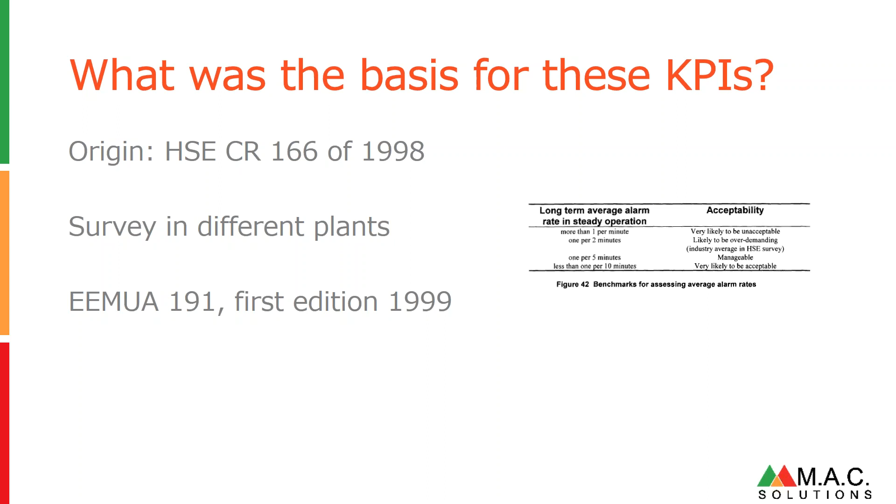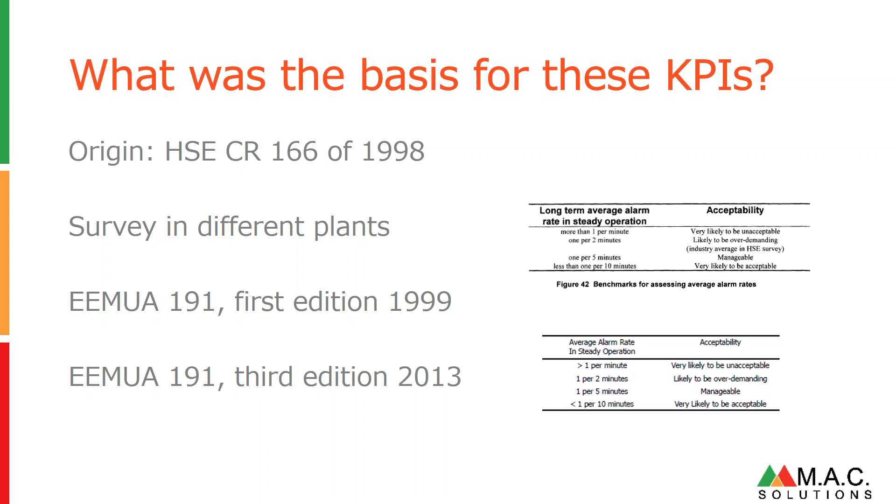So these figures made it to the first edition of the EEMUA 191 publication, which is a guideline on alarm systems, and they have made it until the third edition, which was released in 2013. And there is a table in that edition that says that more than one alarm per minute in steady operation is very likely to be unacceptable. 1 per 2 minutes in steady operation is likely to be over-demanding. 1 alarm per 5 minutes could be manageable, and less than 1 alarm per 10 minutes is very likely to be acceptable. So being part of EEMUA 191, it has also made it to the first edition of the ISA 18.2 standard on alarm systems.

In that first edition, you will find in figure 14 an alarm performance metrics summary, which indicates that the annunciated alarms per day per operating position would be very likely to be acceptable at the rate of 150 alarms per day, and the maximum manageable rate at 300 alarms per day. The annunciated alarms per hour per operating position would be very likely to be acceptable at 6 on average, and maximum manageable at 12 on average. Or, in other words, the annunciated alarms per 10 minutes per operating position would be very likely to be acceptable to be 1, and maximum manageable to be 2. You see there's already a slight difference between the survey performed in the 90s and how it is presented in this table.

Now, when IEC 62682 took the ISA 18.2 standard and they looked at the table, they figured out that the maths were not done properly, because 6 times 24 is 144. So they said in their table the annunciated alarms per day per operator console is very likely to be acceptable at 144 alarms per day, and maximum manageable at 288 alarms per day. Or in other words, the annunciated alarms per hour per operating console would be very likely to be acceptable at 6 per hour, or maximum manageable at 12 per hour on average, which stems from the original annunciated alarms per 10 minutes per operating console being very likely to be acceptable at 1 alarm per 10 minutes and maximum manageable at 2 alarms per 10 minutes.

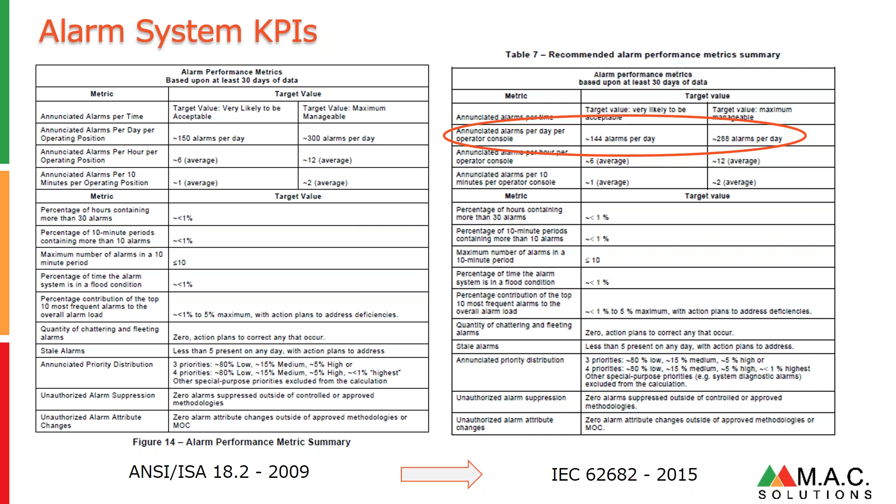Now, when the ISA 18.2 committee gathered again after the IEC 62682 was released in 2015, we found that table a bit outdated. Progressing insights and the calculation of 1 per 10 minutes to 6 per hour on average and 144 per day on average was considered to be a bit odd. So, in the ISA 18.2 2016 edition, a number of these KPIs were omitted. The 144 alarms per day were omitted. The unauthorized alarm suppression KPIs were omitted from the table, and the percentage of hours containing more than 30 alarms were omitted.

So this webinar will discuss a bit why these were omitted and what the danger is of averaging out less than 1 alarm per 10 minutes to be very likely to be acceptable, to 144 alarms per day being omitted from the key performance table.

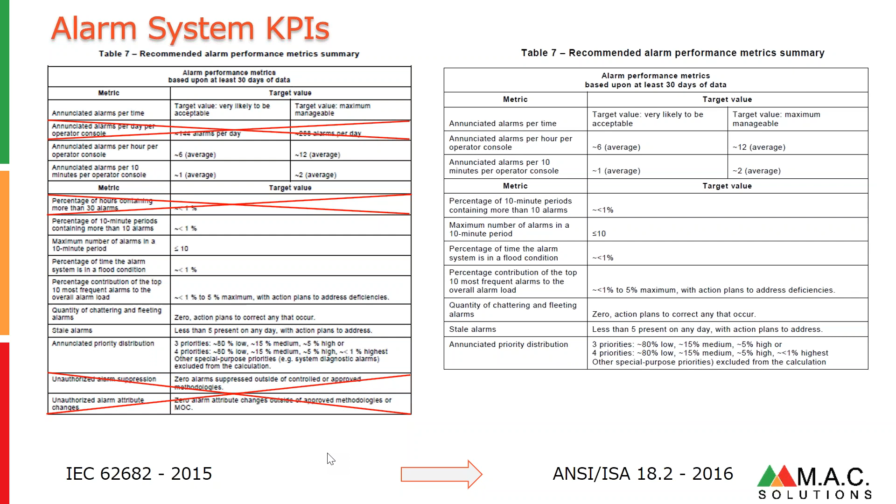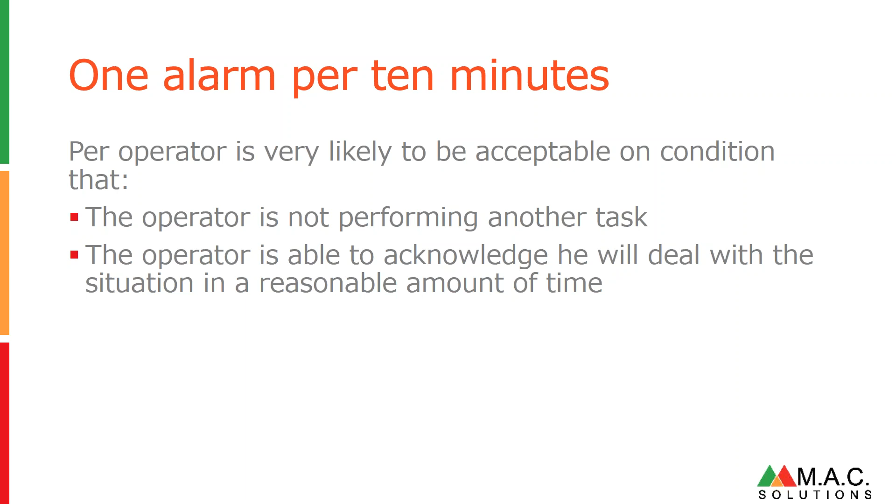So, 1 alarm per 10 minutes per operator is very likely to be acceptable on a number of conditions. The first condition is that the operator is not performing another task, for instance, dealing with another alarm. The operator is able to acknowledge that he will deal with the situation in a reasonable amount of time, meaning he is not doing something else and he has enough time to perform the actions.

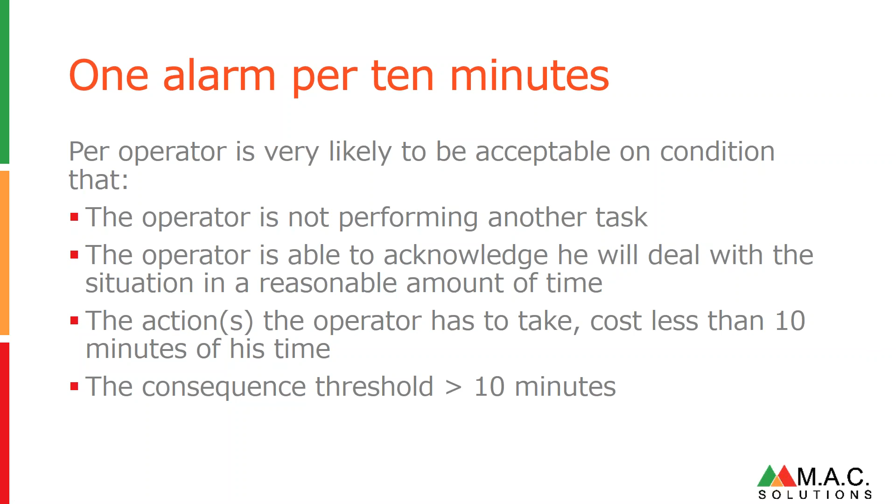Well, talking about actions, the actions that the operator has to take will cost less than 10 minutes of his time, right? And lastly, the consequence threshold, so the time between the operator acknowledging the alarm and the process or device or installation or machine reaching the next consequence should also be larger than 10 minutes. So let's take a look at this consequence threshold.

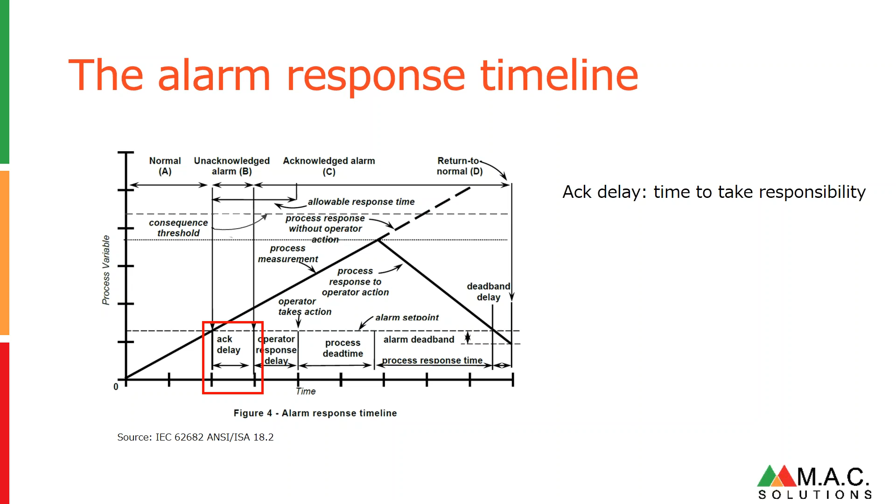So there was a figure published in IEC 62682 and ISA 18.2, which more or less looks like this. It presents a moving value process variable in time, and at a certain point, the alarm set point, it is alarmed. The next delay that is in this figure is the acknowledged delay. Basically, it's a time to take responsibility to deal with the alarm.

The next delay in this figure is the operator response delay. That is the time the operator needs to think before starting actions and performing all the actions. The next delay or time frame in this picture is the process dead time. The process dead time is the time the process needs before any effect of the operator actions become imminent. And lastly, there is a process response time, so that's the time the process needs to return to its normal operating window and the alarm gets cleared.

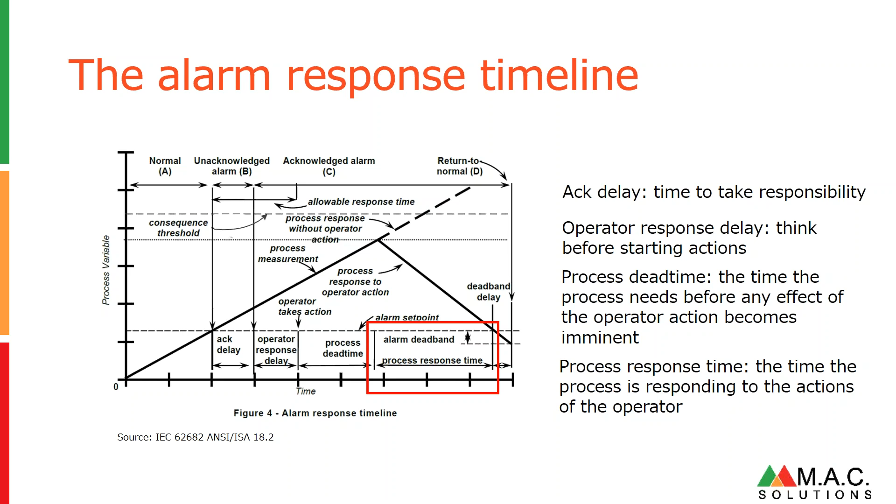So, how much time has the operator actually? So, he has a limited amount of time, being the time between the annunciation of the alarm and the alarm consequence threshold, minus the acknowledged delay and the process dead time. This acknowledged delay has to be taken into account when conceiving an alarm system. For a situation where the operator is supposed to be in front of his desk with all the windows and monitors that are at his disposal, this acknowledged delay will be very short.

I know of a plant where nobody is in the control room and the alarms are broadcasted over the PA system. So there the acknowledged delay needs to take into account the time that somebody walks into the control room and acknowledges he will take responsibility to deal with the alarm. I know of another plant where some of the alarms are sent by SMS services to the smartphone of the operator who might be remote. That can take minutes or hours even, if the person is not responding immediately. So this ACK delay should be taken into account when configuring the alarm.

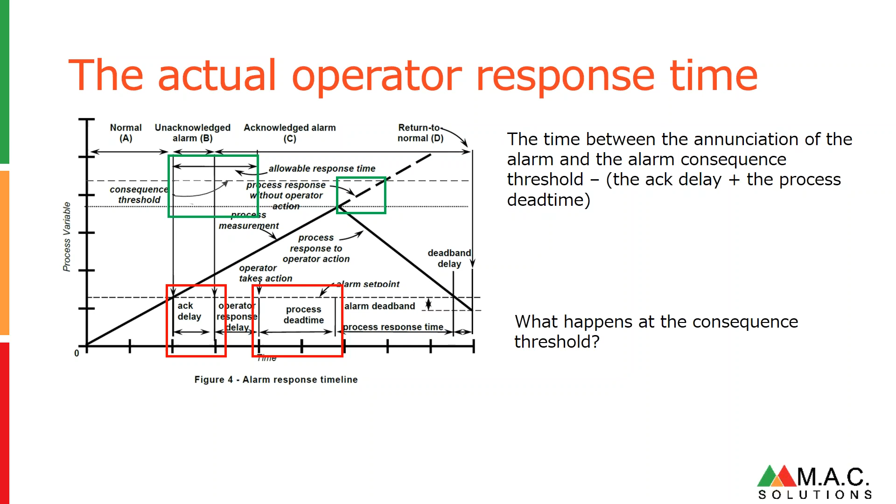The other thing that needs to be taken into account is the process dead time. For fast processes, it can be very short. For other processes, it might take a reasonable amount of time. And when conceiving or configuring the alarm, it should also be considered what happens at the consequence threshold.

Let's look at the actions the operator has to perform when the alarm system detects an abnormal process condition. The operator has to understand the current process conditions. He has to ascertain the future consequences. He has to investigate the root cause. He has to take actions to prevent effects from spreading. He might need to take actions to correct the current process conditions. And he might need to take actions to fix the underlying cause. And furthermore, he needs to monitor the outcome of these corrective actions.

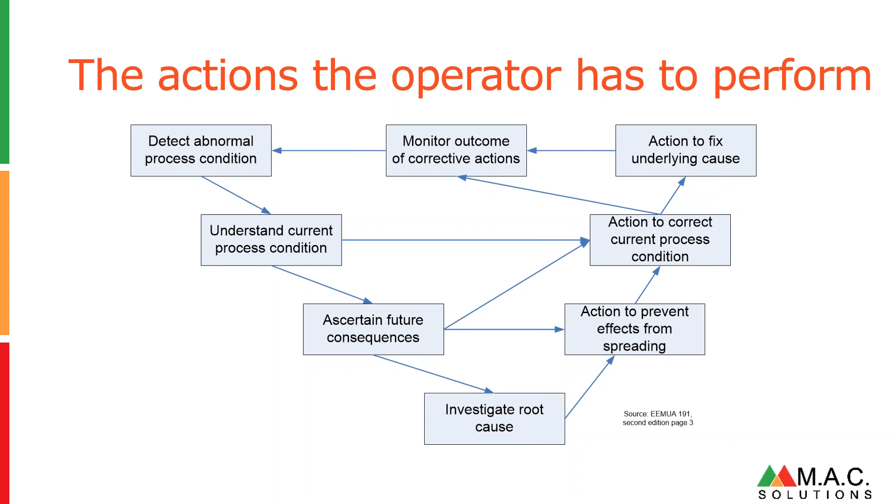So aside from physical actions, the operator must perform a number of cognitive tasks, and he should be trained to perform all these tasks. But the engineer configuring the alarm system or the alarm should also be aware of these tasks. The alarm system and the HMI should be conceived in a way that the attention of the operator will be drawn to the situation that is alarmed. The different cognitive tasks should be taken into account when designing a task-oriented HMI. The alarm text should contain as much information as possible to assist the operator in taking the appropriate actions in the limited time frame available.

That being said, we return to the danger of averaging. 1 alarm per 10 minutes equals 6 alarms per hour on average assumes that the annunciation or the appearance of the alarm is evenly distributed, that the response time on average to take actions on all the alarms takes less than 10 minutes on each alarm, and that the operator, when the alarm is annunciating, has nothing else to do.

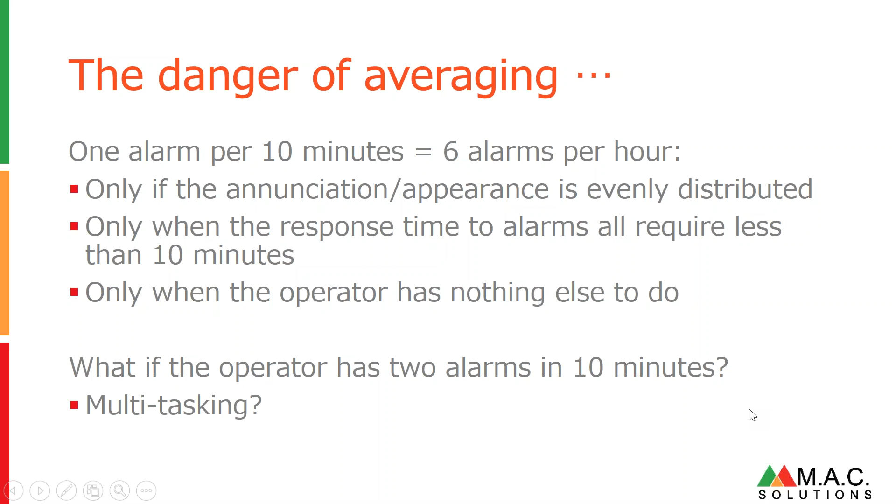So, what will happen if the operator has 2 alarms in 10 minutes? He will probably switch to multitasking. Now, there are some dangers of multitasking. I want to elaborate a bit on this. Recent psychological and neurological studies have pointed out that multitasking is dangerous. It has been considered to be dangerous to telephone while you are driving a car, or even worse, texting when you drive is extremely dangerous. So why would we expose operators to similar risks?

This is what happens if you switch tasks. Your brain has to mentally end task 1, move data from the working memory to the temporary memory in the brain. The brain has to clean the working memory. It has to get the data from the other task, from the temporary memory to the working memory, and the brain needs to rebuild focus. And that goes on and on when you switch between task 1 and task 2.

So it has been pointed out by different studies that the time required to complete 2 tasks while task switching is larger than the sum of the time to complete task 1 plus the time to complete task 2. So it is recommended by psychologists and neurologists to do serial task completion and take a break. So if you would have 2 alarms with the same priority, the operator should deal with the first alarm first, then take a deep breath, and then deal with the other alarm.

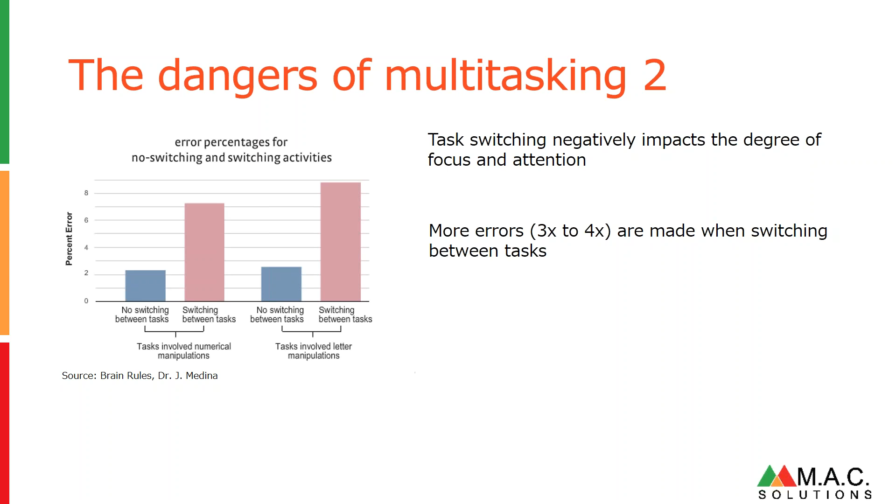Other studies, among others from Professor Medina in the United States, have pointed out that task switching also has a negative impact on the degree of focus and attention. More errors are made when switching between tasks, both on numerical manipulations or letter manipulations. So dealing with more than one alarm at a time per operator should be avoided. And also from the psychology side, having to deal with more than one alarm at the same time induces stress in the operator and the fear of losing control.

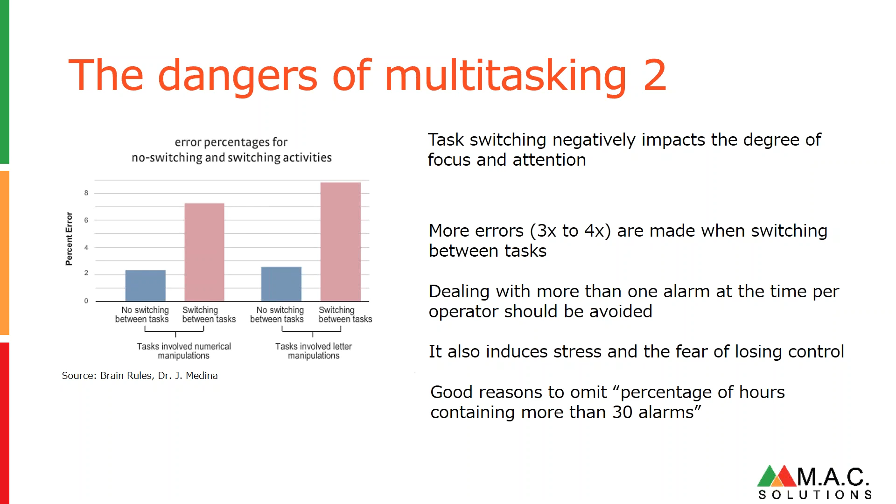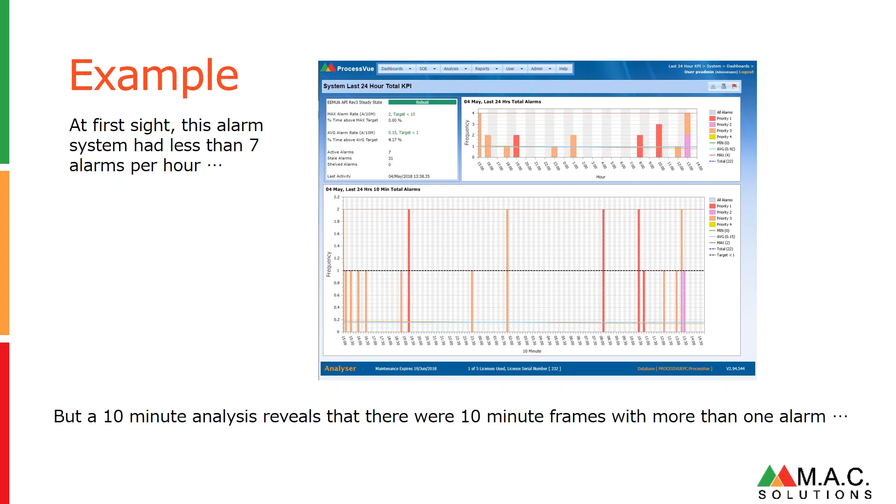All these were good reasons to omit percentage of hours containing more than 30 alarms from the KPI table. This situation should actually never occur. But you also need a tool to analyze in detail whether or not there are situations where you have more than one alarm per 10 minutes. At first sight, this alarm system has less than 7 alarms per hour, but if you look at the detail, you see there are several situations where the operator has more than one alarm at the same time. And even worse, in this case 3 of these were of the highest priority. So alarms at the same and highest priority will force the operator to do multitasking.

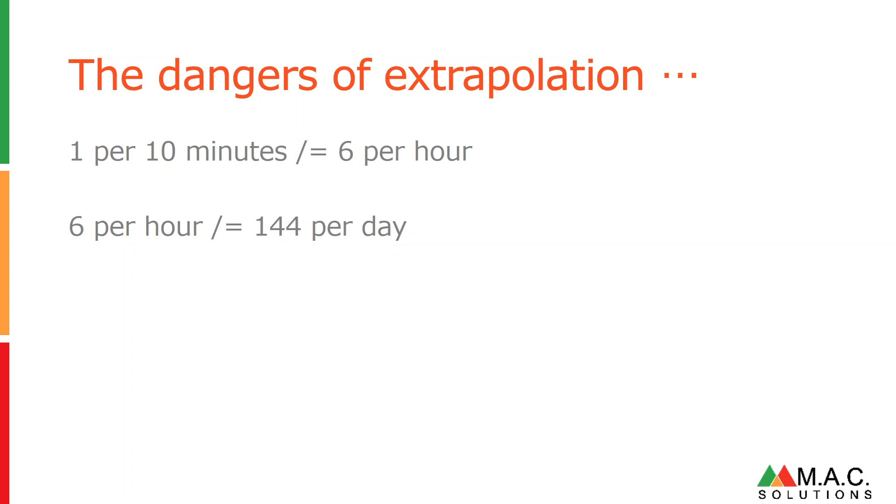Now we have seen that one alarm per 10 minutes does not equal 6 alarms per hour. It's not because you can produce 10 hamburgers per hour that you can eat 6 hamburgers per hour, right? So if you consider that this is not very reasonable, then the further extrapolation of 6 alarms per hour to 144 alarms per day is even more nonsense. These 144 alarms a day can all fall in 1 hour, in one shift. And furthermore, we don't want one operator to work 24 hours per day, right? The KPIs were defined for the operator, not to overload him.

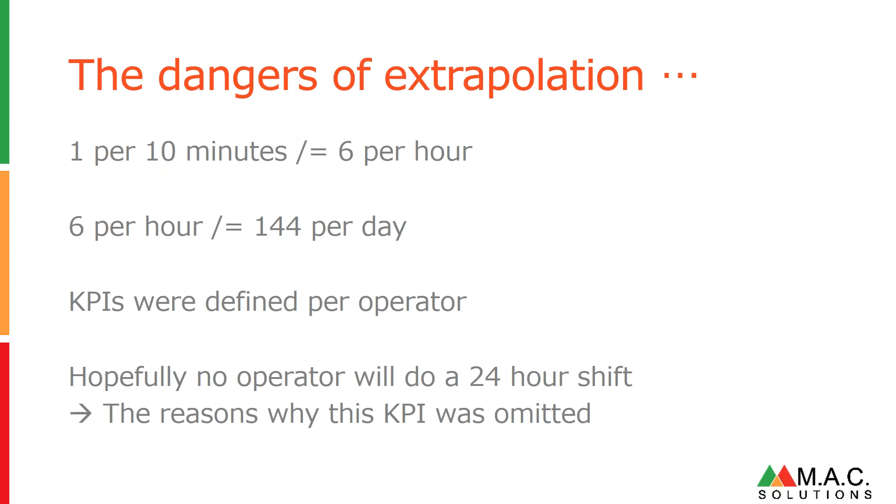So, those were the reasons that the KPI of 144 alarms per day being very likely to be acceptable was omitted from the table in ISA 18.2 revision 2016. So what is a good KPI? Well, it's not because a standard or guideline recommends KPIs that they should be your KPIs. There is no obligation whatsoever that your alarm system needs to comply with the recommended KPIs from the standard. Your average alarm rate KPI should depend on a number of other things. For instance, the type of process you're running, whether it's a continuous process or not.

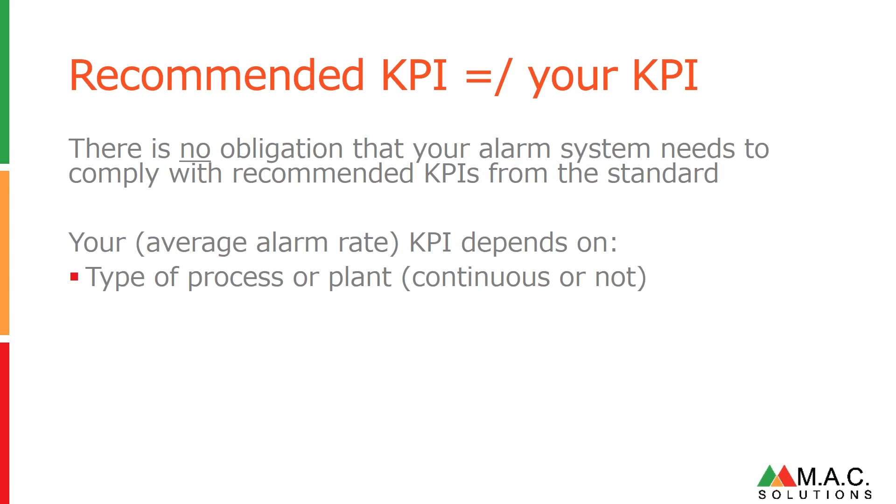The involvement of the operator. Is he near the operator console or is he far away? Is he near the process or is he remote? I know of control rooms which are onshore, which monitor operations on the North Sea. Well, you can tell that the operator is there quite remote from the process or the installation he is monitoring.

And furthermore, the average alarm rate depends also on the complexity and the duration of the actions that the operator needs to perform. In a complex plant, these can vary from very simple, changing a set point, to very complex, having somebody go outside, perform a number of actions, and then see if the process responds to these.

Another thing to take into account is how your alarm system is performing today. Because if you set your goals at a level that is perceived as unachievable, nobody is going to make an effort to achieve these average alarm rate KPIs within a reasonable time frame.

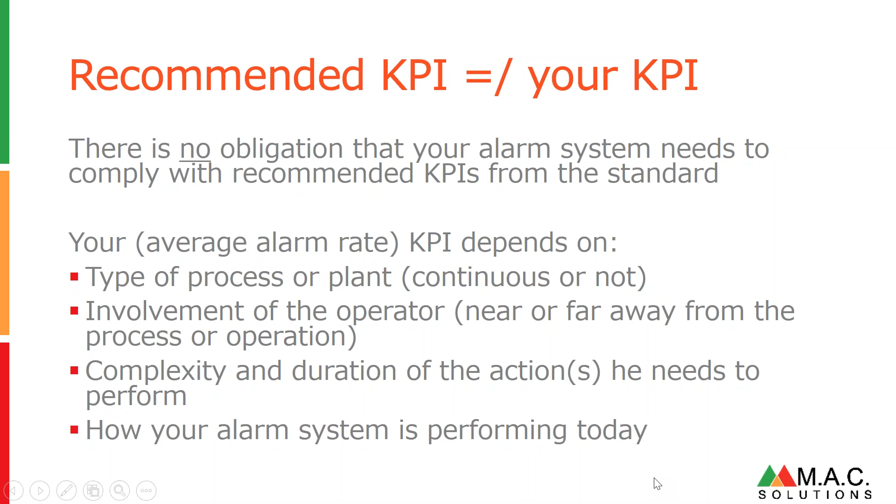So what would be a reasonable KPI for the alarm rate per day? So if your alarm system today generates 1 alarm per minute, then 1 alarm per 2 minutes could be a reasonable KPI for your site for the first year you put an alarm philosophy in place.

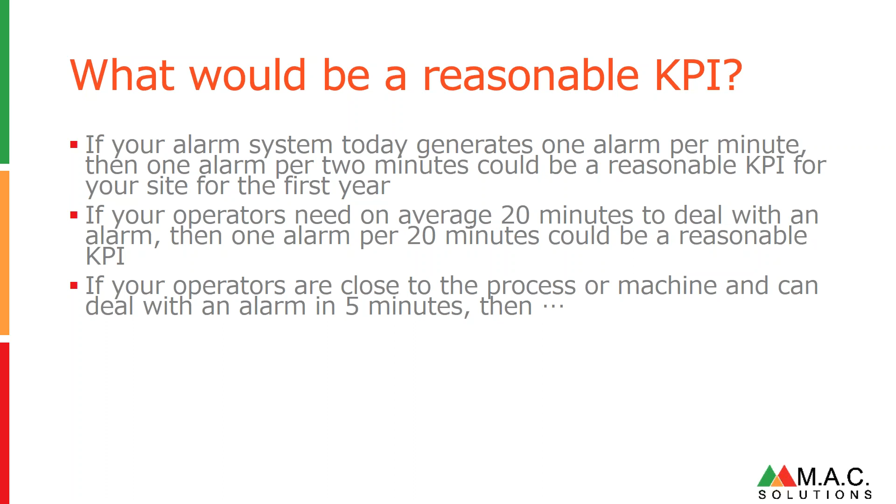If your operators need on average 20 minutes to deal with an alarm, then one alarm per 20 minutes could be a reasonable KPI. And if your operators, for instance in a batch plant, are close to the process or the machine they operate and can deal with an alarm every 5 minutes, then it could be one alarm in 5 minutes. In other words, based on the operator response time estimated during the rationalization process, these KPIs should be set.

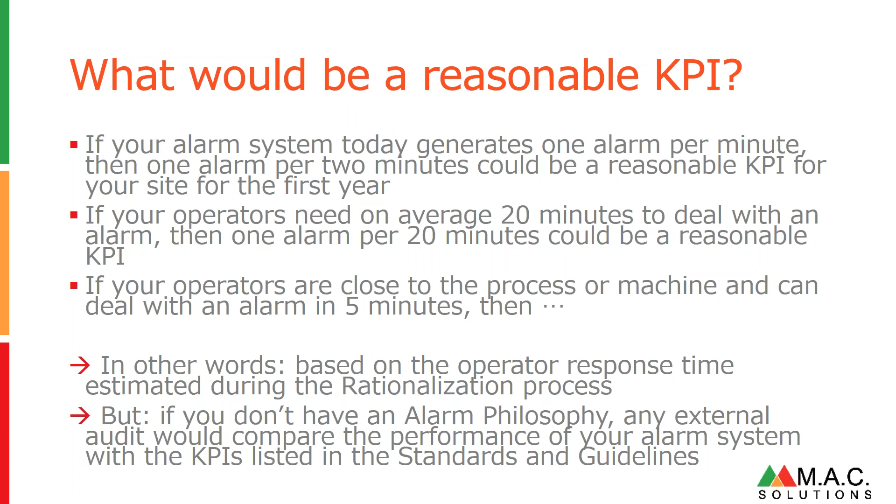But if you don't have an alarm philosophy, then any external audit would compare the performance of your alarm systems with the KPIs listed in the standards and guidelines. That was on the average alarm rate.

There were actually two items omitted from the KPIs, which are the unauthorized suppressions and the unauthorized alarm attribute changes, which are no longer KPIs. Some companies and industries allow operators to suppress or change. Where you have companies that do not authorize changes, they should put in place a procedure or a tool and not a KPI. So if you don't allow operators to suppress or change alarm attributes or alarm limits, then you should monitor these changes all the time.

And how do you monitor it? You need to set up a master alarm database to see the deviations that have been entered against what you have set in your master alarm database as the right and appropriate alarm limit or alarm parameter for that alarm.

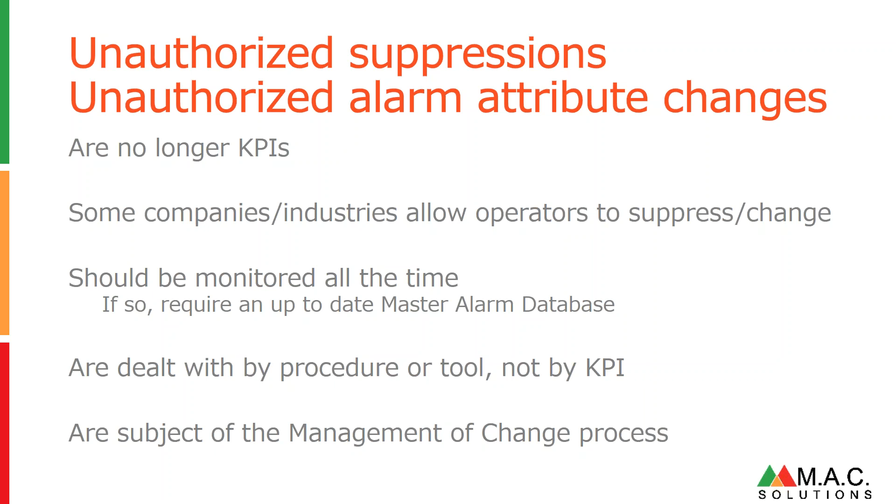So, unauthorized suppressions and unauthorized alarm attribute changes should be dealt with by a procedure or a tool and not with a KPI. They are also subject to the management of change process. If you want to change an alarm attribute, then an appropriate procedure should be followed, and that should be managed as a change in your alarm system.

So, as a conclusion, I would recommend that your alarm philosophy sets your alarm system KPIs, also the average alarm rate KPIs. Take into account that different operating modes can result in different KPIs or different sets of KPIs. Remember the survey was performed at 40 sites in the UK, which were all continuous plants. So if you don't have continuous operations 24/7, then you might have a set of KPIs for your production shifts and a set of KPIs when there is no production.

It's important to choose a monitoring and assessment tool that can deal with the fact that you set your alarm KPI to something different than what is listed in the guideline. And consequently, make sure that the reports allow you to analyze the rate you have set in your alarm philosophy, so you can do per 5 minutes analysis, per 10 minutes analysis, or per 20 minutes analysis.

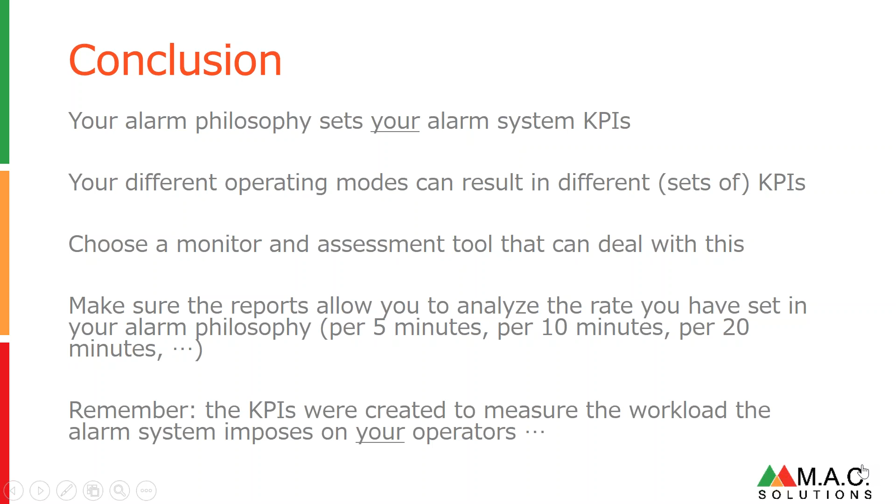And lastly, and most importantly, the KPIs for your alarm system were created to measure the workload the alarm system imposes on your operators. So, make sure you have reasonable KPIs in your alarm philosophy.